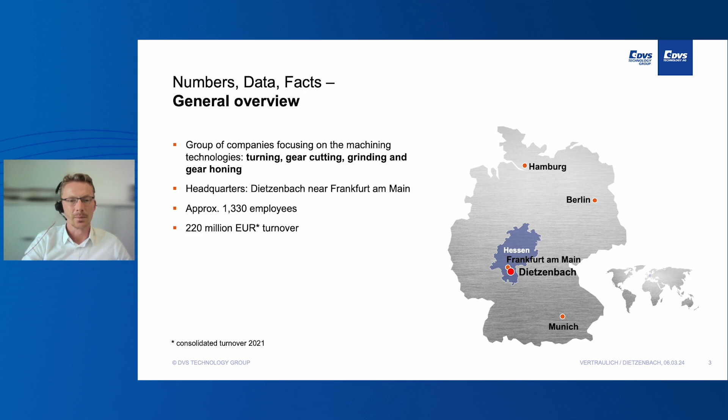This slide might be a little overwhelming, but as I said, we are a big company. Some of you might know some of our companies and brands, for example Präwema, Pittler, Buderus Schleiftechnik - very well-known brand names in the cutting machine tool industry. This is our first business unit, Machine Tools and Automation, which is the foundation of our company.

The second business unit is DVS Tools and Components, where we design and produce our own tools, for example grinding wheels, honing rings, and all the tools for our skiving machines and honing machines. Last but not least, we have a very interesting business unit called DVS Production.

Here we manufacture parts for eDrives in series production. This is very important for this presentation as well, because we are going to talk about the ring gear and the step pinion today. In DVS Production we do serial production of ring gears and step pinions, and I think you can imagine we have learned some really important lessons in this endeavor. Those lessons learned, we of course feed back into the processes and design of our machine tools.

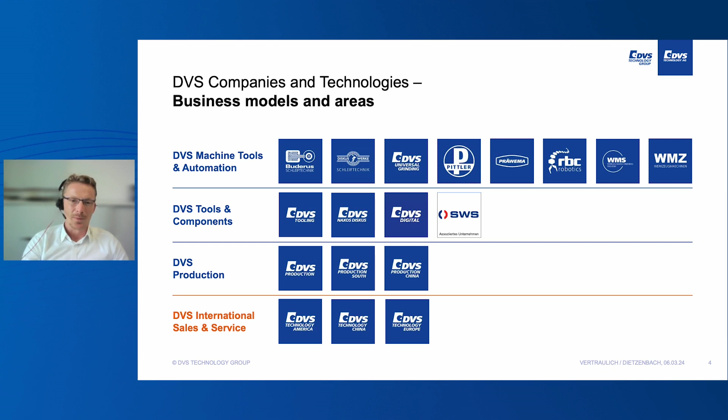In the eDrive industry, regarding gearboxes, we have 2 different basic designs of gearboxes. On the first hand, the offset drive, which is on this slide. We are very proud that we can provide solutions for all the mission-critical workpieces on this gearbox, like the rotor shaft, ring gear, drive shaft, and the two intermediate parts, intermediate shaft and intermediate gear.

For all those projects, we have references in the market. And of course the same goes for the concentric drive. In the concentric drive, there is the ring gear and the step pinion, and those two parts we are going to discuss in more detail in the next 2 chapters.

There are 2 very special things regarding the ring gear, so it's a part which needs to be handled with care - I think that's one of the bottom lines. So that's already a little teaser for our presentation, and the step pinion.

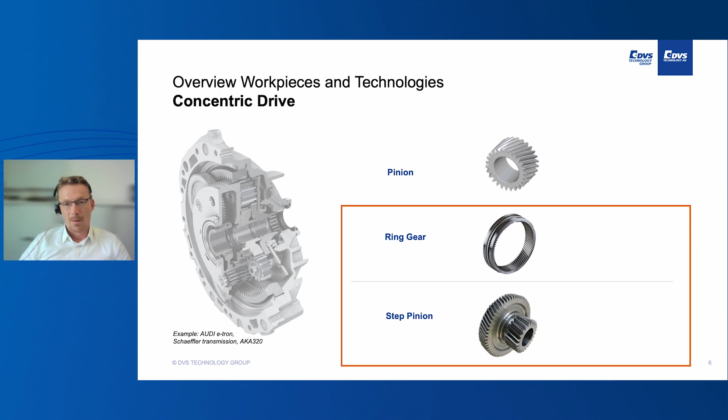There is a feature called timing, which is one of the really special things at the step pinion, which you need to consider during the manufacturing process. Last but not least, all those parts have one thing in common: all the parts I've shown you on the 2 slides are really mission-critical regarding the NVH behavior of the eDrive gearbox. That's really critical, and that's it from my side as a little introduction.

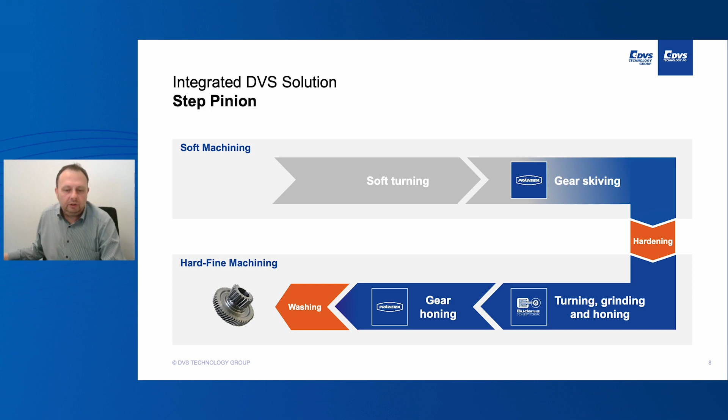As DVS, we are a system supplier and tool machine supplier. For the soft machining, we look at a Synchroform V from Präwema, and for hard machining, we look at the Buderus grinding machine as well as the Präwema Synchrofine gear honing machine.

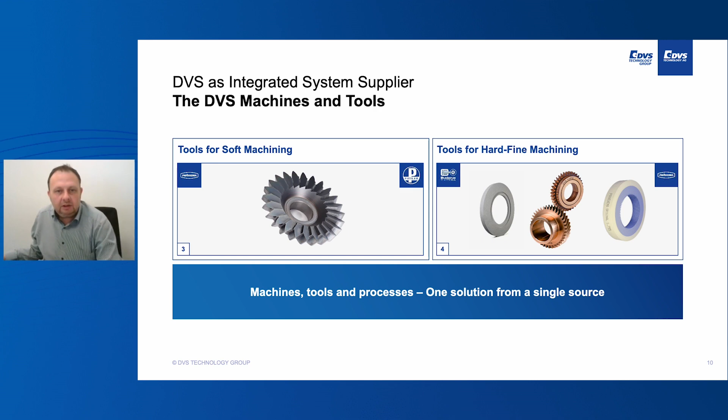Also integrated in our DVS group is the tool business, so we can supply the whole system—the machine as well as the tooling. That includes the design of tools, so we are responsible from beginning to end. There's no interference between the supplier of the tool and the machine, and that's the best solution for our partners on the worldwide market.

Now let's look at the solutions for the step pinion in more detail. First we'll go through the soft machining, followed by hard fine machining of the gear. Before we jump into the processes, it's more or less a must to look at the workpiece.

On this page we show what we call timing. Timing is nothing else than the relation between the two gears on the step pinion, and this relation fits only in one position. This is not true for all step pinion designs on the market, but for many, and it makes it necessary to have the processes under control from the beginning, considering the relation of the two gears from first machining up to final hard finishing. That's important, and later I'll show some points where I can demonstrate the necessity.

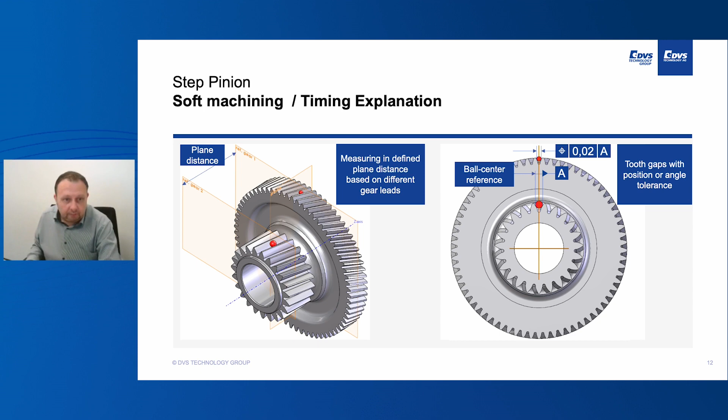Soft machining of a step pinion: the first step, for sure, is the typical turning operation in first and second clamping. This is the first step where we have to consider high accuracy.

Regarding the timing—if you think about the picture before, there is a ball in a helical gear, and if the lengths are not okay, the ball will shift according to the helix angle, and the timing will no longer be in tolerance. That's why it's important to take care from the first process on.

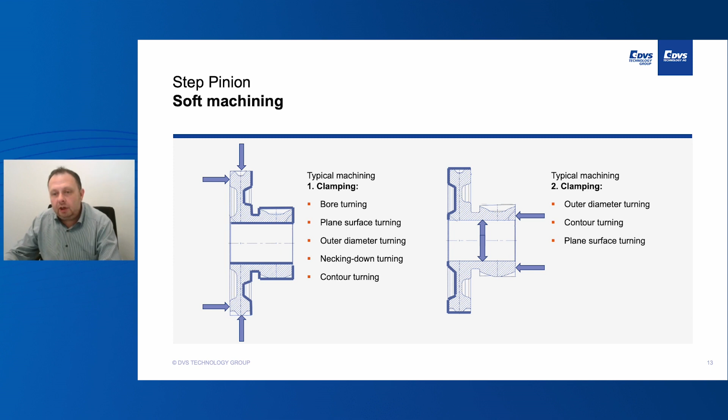So as I said, soft machining typically involves bore turning, outer turning, inner turning, clamping inside, and finishing the outer diameters and outer face of the part. Then we come to the gear machining.

After the soft machining, we use this as a reference to clamp the part and locate it accordingly. We can do a tip diameter turning—this is sometimes requested and recommendable for following processes.

It's up to the customer to do the bigger gear first by skiving, and second the smaller gear by skiving. We can provide different solutions: one could be a machine that does the big gear on one spindle and the second gear on a second spindle. Also possible is a solution with two tools in one workpiece spindle—we call it a tandem tool—so we can produce the big gear and the small gear in one clamping on the same machine. Critical for the small gear is the interference with the big gear.

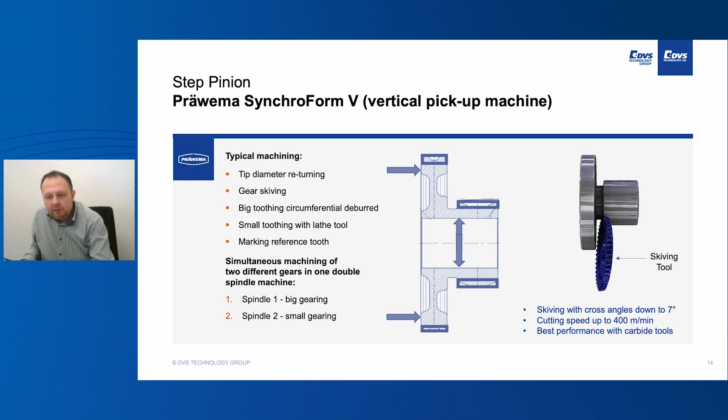This is shown in the picture on the right side. There's a small gap, and this limits us absolutely in the crossing angle, meaning not ideal cutting parameters, but we are able to use the skiving process with a cross angle down to 7 degrees. For information, 20 degrees is the optimal cross angle for the skiving process.

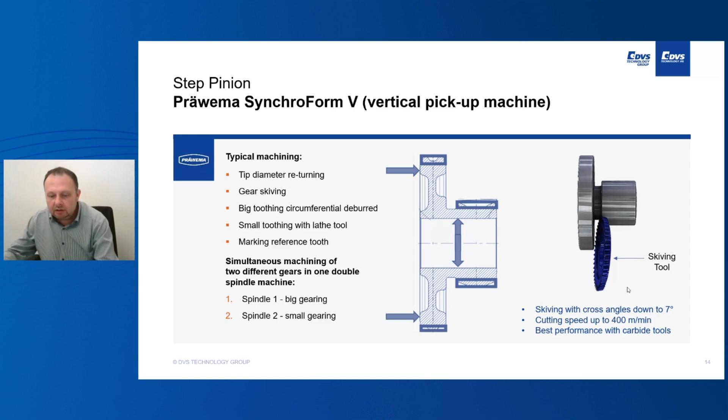After soft machining, we have the heat treatment - not in our portfolio, as I said. That means after heat treatment, we get the part back in our production line, and we will have first hard finishing of this step pinion, hard finishing on Buderus iCompact.

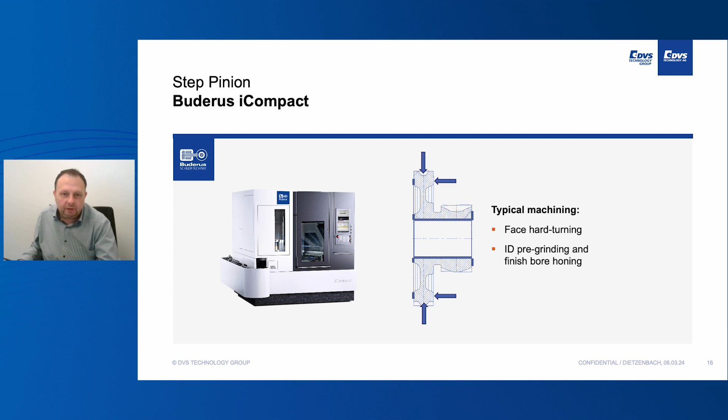The iCompact does hard finishing in two operations. One is hard turning, mostly used for the faces, and the grinding operation to finish the bore. We use clamping inside the gear, or, related to customer demands, clamping on an external OD of the bigger gear. Therefore it's recommendable to do this pre-turning in the soft machining, to keep the best relation between the gears and the bores.

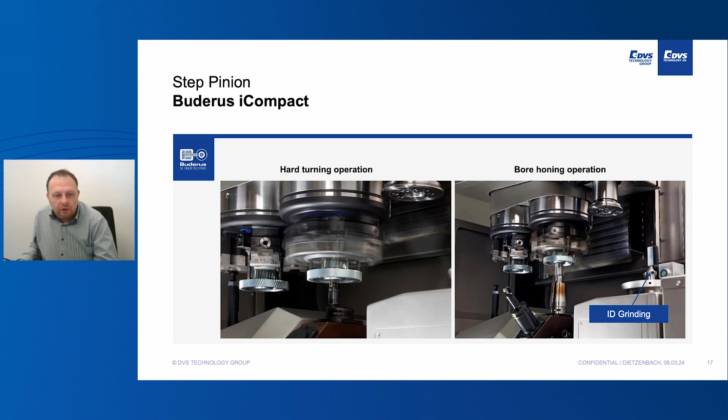Here we show some pictures from the working area of the Buderus iCompact machine. On the left, it shows the hard turning, and on the right, it shows the bore grinding, ID grinding, and bore honing solution, which we have on the market for finishing this step pinion.

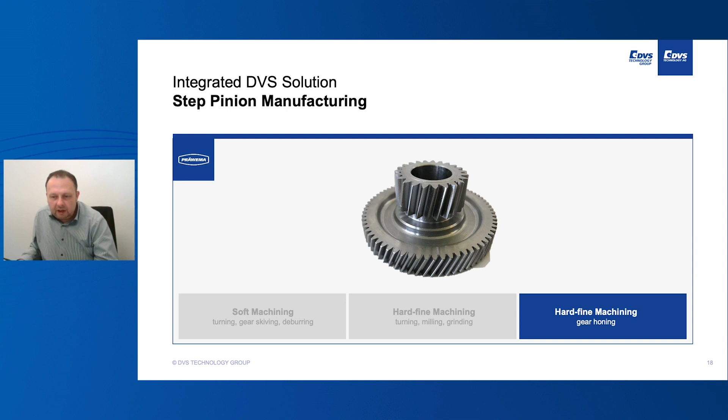Finally, after hard machining of faces and bore, the part needs to be finished in gear accuracy. Therefore we have hard machining of the gear. This will be done in a Präwema SynchroFine gear honing machine, which could be single spindle or double spindle. Both gears could be done by the honing process in two setups - first the small or big gear, up to the customer's demands.

The honing process itself is working with what we call the X-cross angle, bigger than 3 degrees absolutely safely. For the step pinion, we had to push solutions and create solutions so that we are able to hone also with the limit X-cross angle, which is a little bit lower than 3 degrees.

You get all the advantages of the honing process. That means you will not have bias coming out of the process, as happens with the grinding process, but you can create the bias by programming. There is no risk of grinding burn for the gear because the cutting speed is around 10 to 12 meters per second. Grinding burn is to be avoided from a cutting speed which is higher than 18 to 20 meters per second.

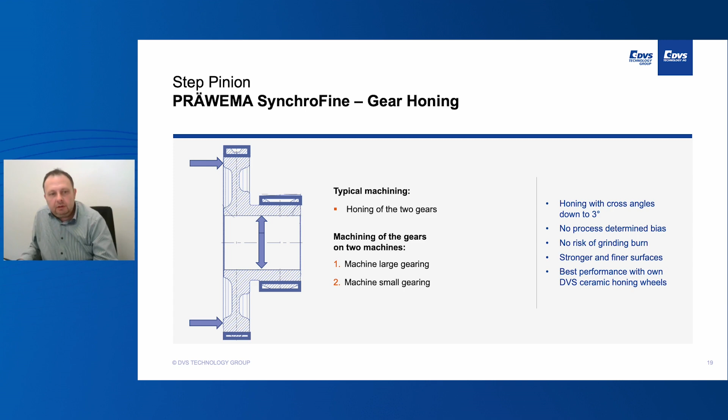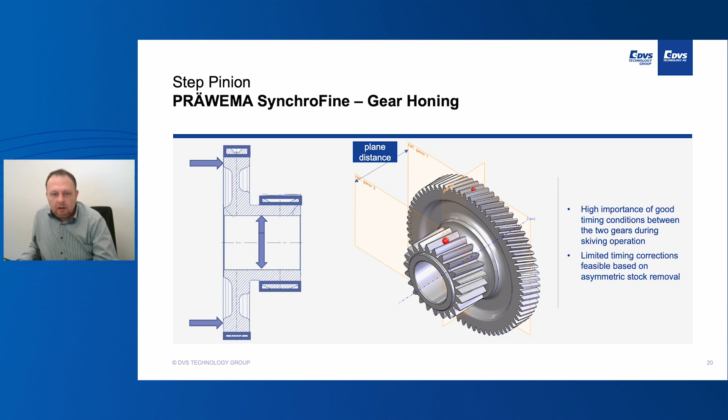That's about the step pinion. Now I'd like to jump over to the second part - the ring gear solution out of the DVS group.

Basically there are two systems we can see on the worldwide market for how to handle these ring gears - two process flows or workpiece flows. In the beginning, green or soft machining is the same: turning, gear cutting, and then it starts to differ, in the hardening process. One solution could be case hardening, another could be nitriding. In case of case hardening, face grinding and cylindrical grinding is necessary because case hardening has much higher distortion than nitriding, and finally we have to finish the gear by gear honing.

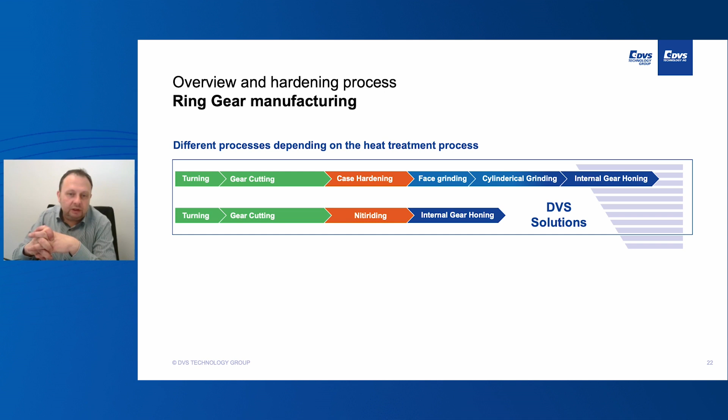In case of nitriding as the hardening process, the distortion is much smaller, and it's not necessary to have face grinding and cylindrical grinding - you can go straight through the internal gear honing.

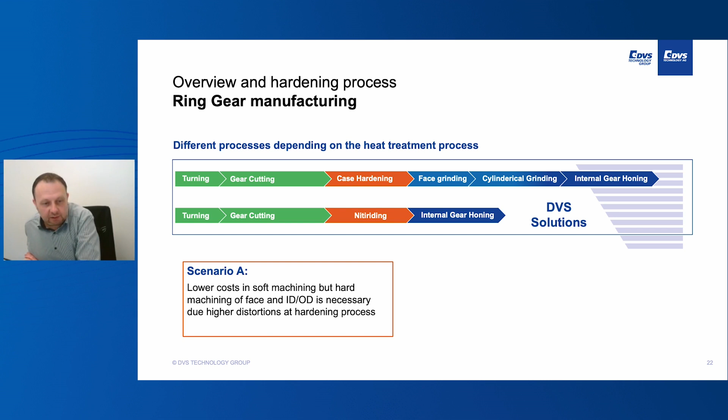Now for sure everybody asks, why aren't we only doing nitriding? It looks much easier with fewer processes. Yes, both have pluses and minuses. Scenario A, case hardening, is the process with much lower costs in soft machining - this is related to the strong material necessary for the nitriding process. Nitriding, on the other hand, has the disadvantage of higher costs in soft machining due to much lower lifetimes of the tools.

But it could be avoided to do face grinding and cylindrical grinding after heat treatment or after nitriding. So these are the two scenarios existing on the market. It's difficult to say which is more or less common. For today, we want to jump a little bit deeper into scenario A.

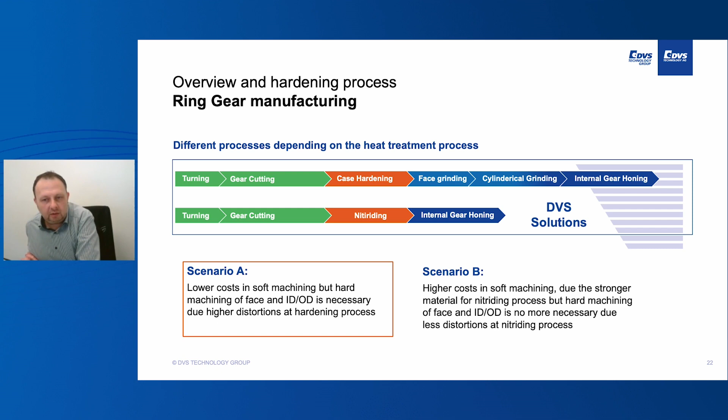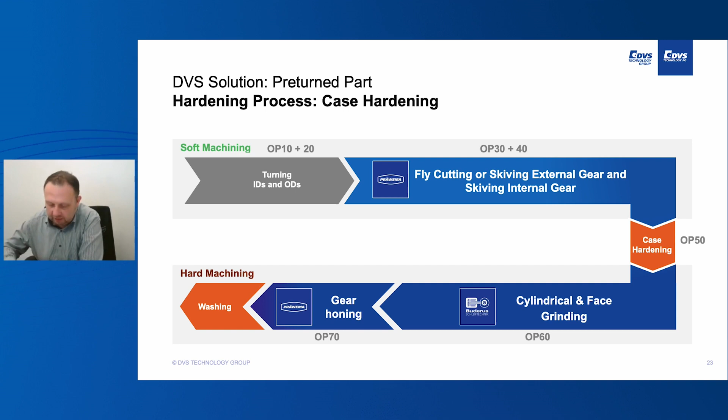In the case hardening process, followed by grinding processes, the process flow will look like shown. We start with fly cutting or skiving of external and internal gear. This is related to the different designs. Sometimes it's necessary to have outer gears, which we do with the second process like fly cutting. After soft machining, it's the same case hardening outside of the DVS portfolio. Then we get the parts back to a Buderus grinder and do the grinding operation, face and bore grinding and hard turning. Finally we have the gear honing, and after that the parts go through the washing line.

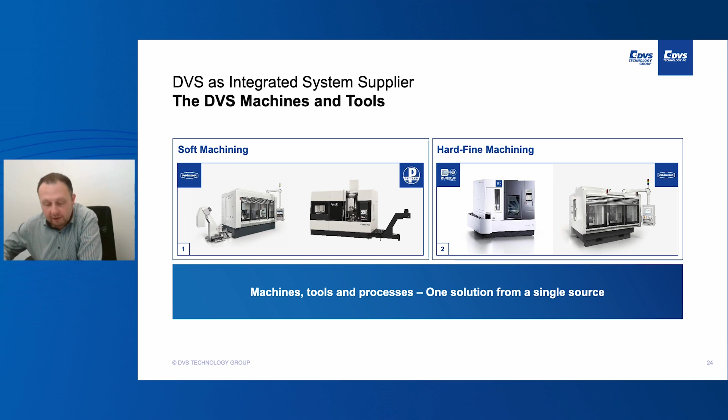The solution for the DVS group or machine solution from DVS side could be soft machining at PRÄWEMA or either a Pittler machine. This is related to number of workpieces, sizes, and also space on the floor. Hard fine machining will be done in that case at Buderus for the bores and faces, and at the Präwema SynchroFine for finishing the gear.

The soft machining in that case will be on a PRÄWEMA machine, followed by hard fine machining in the next step, also for the ring gear.

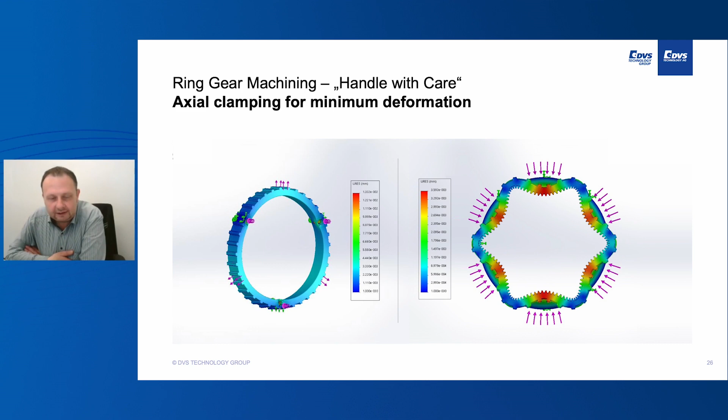We have to talk about the workpiece themselves before we jump into the processes. The ring gear has, from the shape, not the best conditions to clamp in the machine and to control deformations. That means if the clamping is too strong, we deform the part, or we give the part a form, and after releasing it flips back to the older form, or we can see the gripper jaws, for example, or the brackets from a clamping fixture later in the measuring reports.

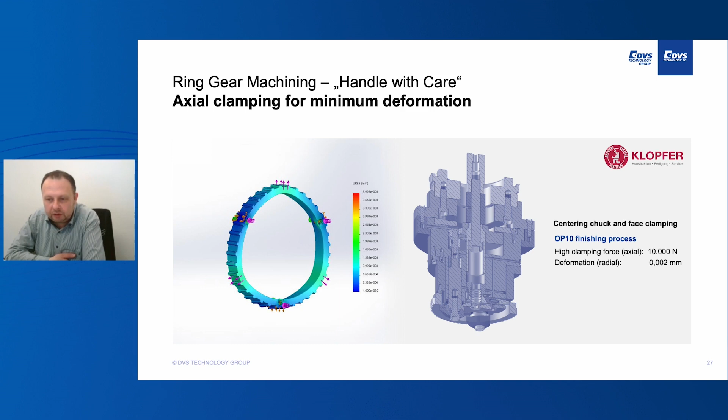So therefore different solutions exist. One solution shown here is working with a slight centering so that we avoid any deformation in the circle, and a face clamping with 10,000 Newton. This avoids the radial deformation to less than 2 microns.

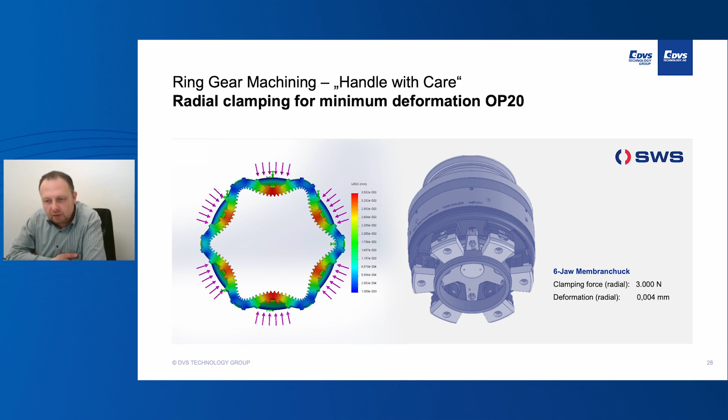Another solution could be a 6-jaw membrane chuck, and with this 6-jaw membrane chuck, less clamping force is necessary. We're working with 3,000 Newton, and with the 6-jaw it's possible to have more or less equal pressure over the 360 degrees, so that we don't have much deformation. We're talking about 4 microns in that case.

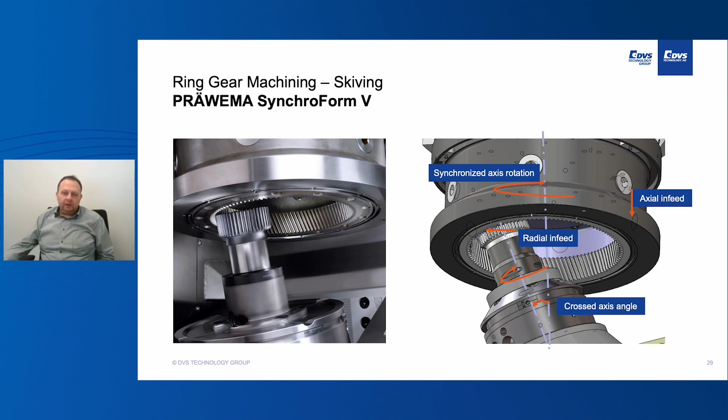So now the Synchroform skiving machine for soft machining. It's a vertical machine available in different options or configurations. The skiving process itself works with the rotation of both axes, meaning the workpiece and tool axis rotate at the same time. With the synchronization given from the NC control and an axial feed rate, we can cut the gear step by step through the tooth, through the ring, and then we get a ring gear.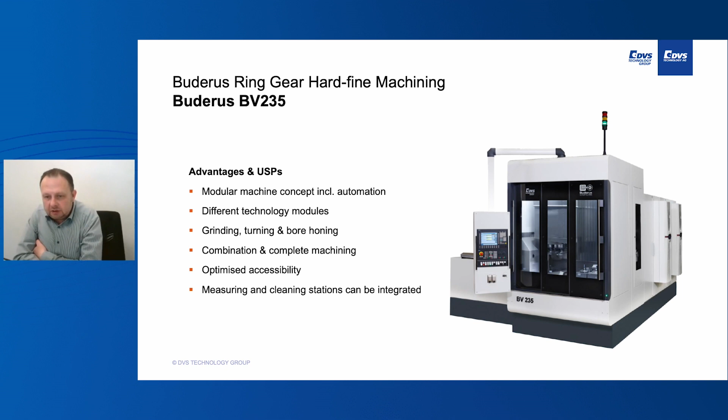After soft machining, followed by heat treatment, we get the parts back for hard machining, turning, milling, grinding on the Buderus BV235 machine. This machine is very good with the modular machine concept, including automation. You can implement different technologies, and this is done on what we call a technology platform, where we can place the technology modules according to the necessities of our customers.

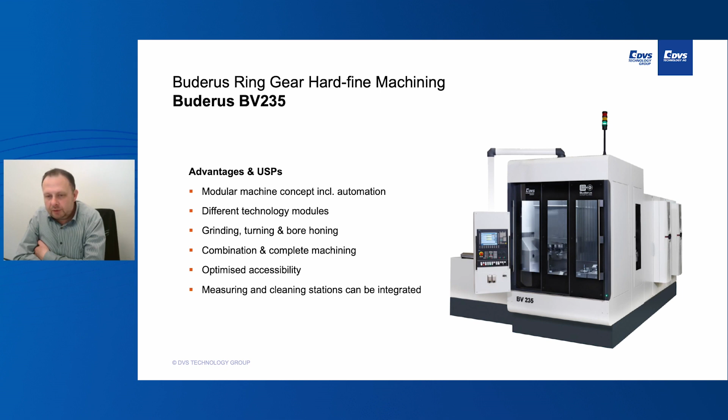We try to put this on a very small working area that's good and optimized for cycle times as well. It saves floor space in the factories, which nowadays is also many times a question. Last but not least, different measuring and cleaning stations are also available. If there's a need, we can install this in the automation area so that measuring and cleaning can be done in parallel while the machine is working, causing no additional cycle time.

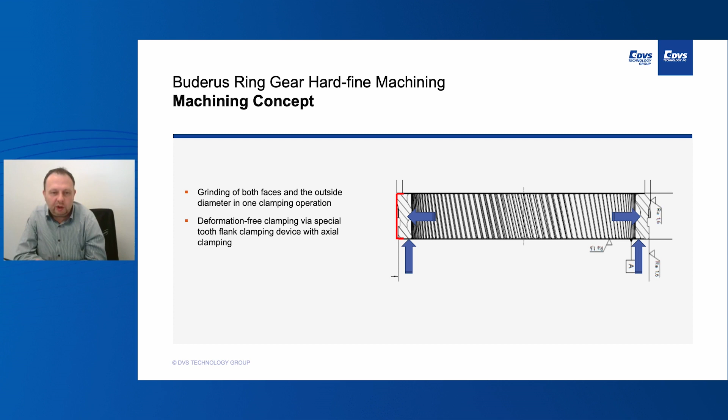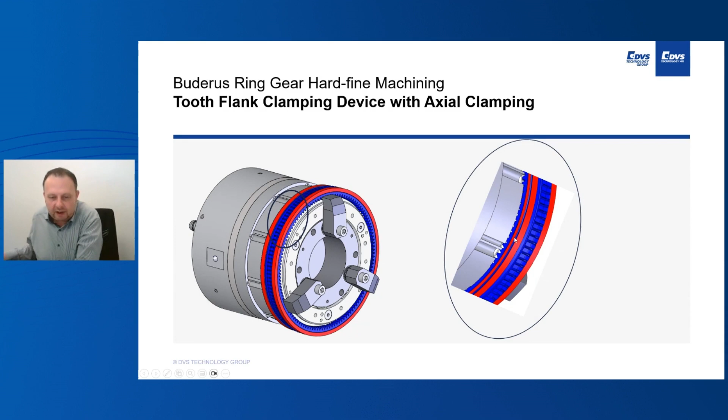The ring gear clamping system at the Buderus hard fine machining has the possibility to do orientation in the gear, and we can center in the gear, clamp on the face, and do the grinding of both faces as well as the external diameter in one clamping. That shows the clamping solution, and the red marked areas show what will be done in one clamping at the Buderus machine. That means grinding of the first face, front face, the diameter, and here we have a look from the rear side, where we also do the grinding on the rear face. So one clamping and the part is finished in the grinding operation.

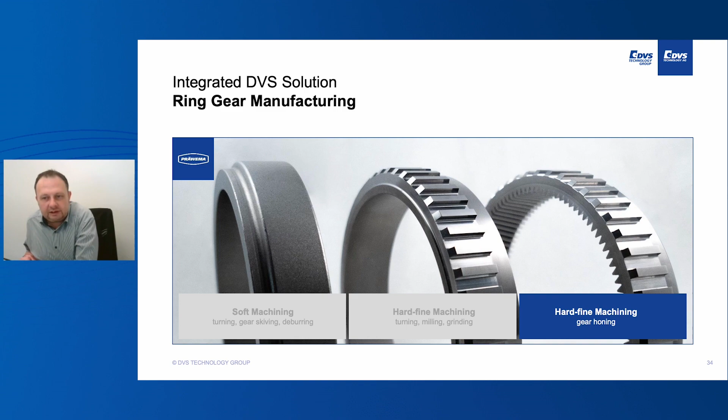After this grinding operation, the part goes through the hard fine machining of the gear. This is done by internal gear honing, and the internal gear honing uses a similar system to the skiving and the same system as external gear honing. We need a cross between the two axes, the axis of the workpiece and the axis of the tool, and we also need synchronization from NC. We have a radial feed rate and a small oscillation, and it takes around 60 seconds to clean up the part and do all the corrections necessary and required for the final part quality.

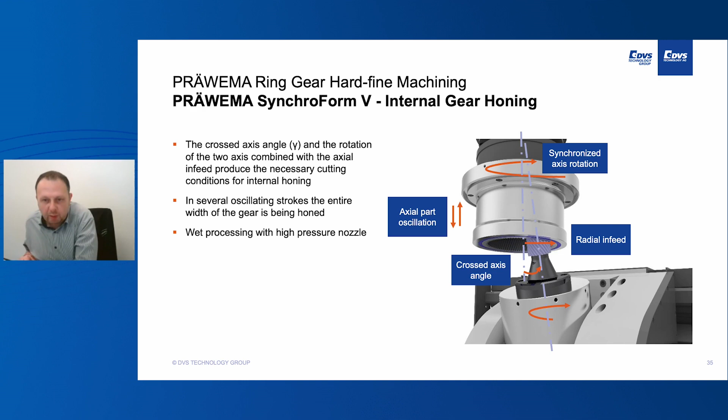In clamping for the internal honing, we use the same locating area as given from the grinding process in the Buderus machine, and we clamp on the same diameter produced in one clamping at the Buderus machine. In combination with the orientation of the tooth and the centering at the pitch diameter, this is the best solution to get very good quality out of the honing machine. If both processes are optimized, there should be no deformation and no deviations in the measuring report after hard machining.

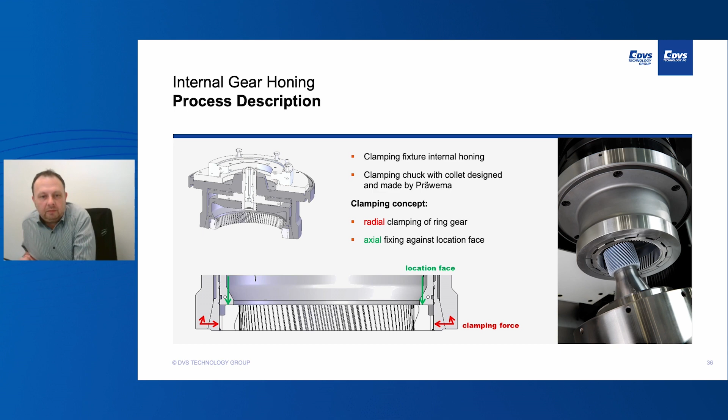One question was not given, but I want to talk about it: why we have to do hard finishing, in that case internal gear honing of the ring gear.

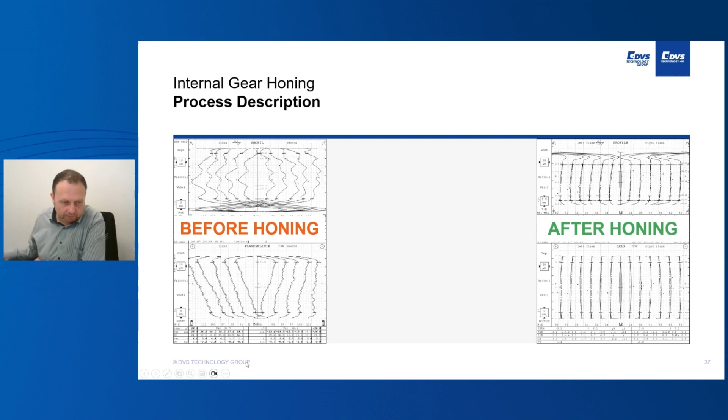This page shows on the left the measuring report from a ring gear after heat treatment, before honing, and the right picture shows the measuring report of the same gear after honing. The required quality nowadays for all components in the e-drive is according to what we see on the right side. Parts without hard finishing are no longer usable for the e-drive nowadays.

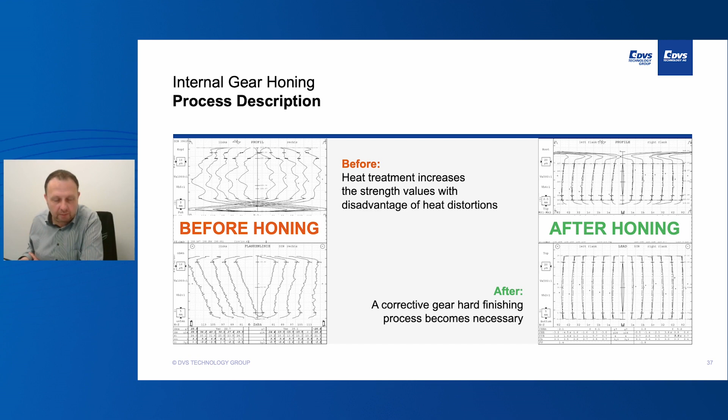Hard finishing of internal gears, in comparison with external gears, is absolutely seldom, and it came up in the car industry with the e-drive. Internal gear honing is in that case the best solution, because we can offer the best solution in costs per piece for our customer. We did different and many tests, and this shows a scenario from what we did one or two years ago.

We did production on a ring gear, and we started with a diamond coated tool, with tool costs at 80 euro cents, 0.8 euro. We changed to the dressable tool and came down to 40 euro cents, meaning we had half the costs. It was also interesting to compare it with hard skiving, since we have all of that in our hand.

That means also the production of skiving tools. We did it, and the outcome was that we are much higher in cost than with the diamond coated tool, and finally four times higher than with the dressable tool. The dressable tool is more or less the state of the art nowadays for internal gear honing.

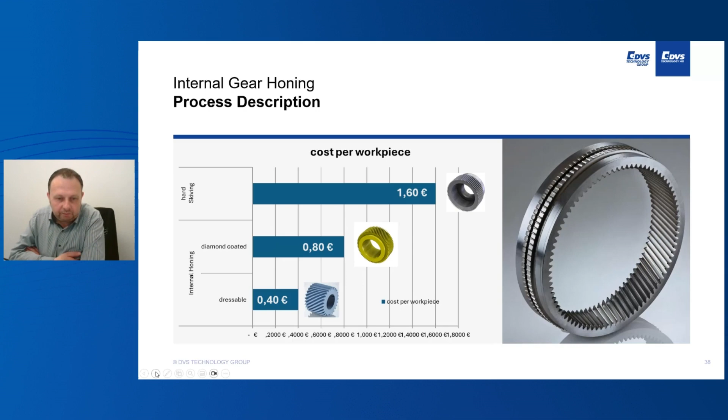Thank you, and I'd like to hand over to Andreas, who will give you a short summary about the pages before. Thanks, Mark. I think that was a very important and interesting presentation regarding the two workpieces, step pinion and ring gear.

As a little summary, I think we can say step pinion and ring gear are really demanding workpieces which are critical in modern e-drives. What we have learned is that the step pinion timing needs to be considered from the very first chip, even in soft machining. I think that's one very important conclusion, besides all the other things we have learned.

Regarding the ring gear, as I already said in the beginning, it is a very sensitive part which needs to be handled with care. And regarding the clamping, there are some important things to consider. And of course, for both parts, as Mark very nicely explained...

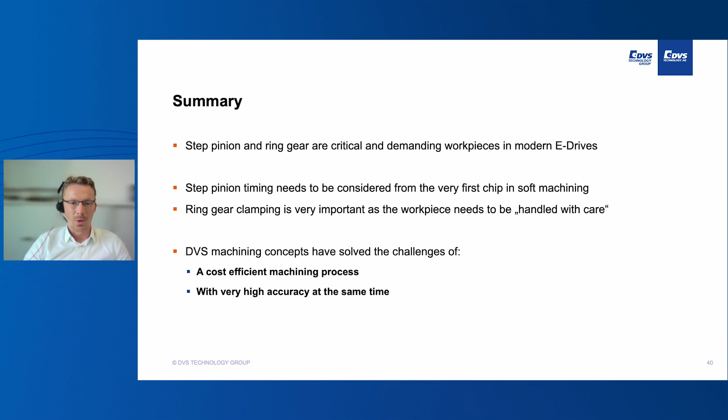...the hard finishing, the gear honing, is the last step. So that's one very special thing. I would say our DVS machining concepts solve two challenges: first, which is important for all of our customers, a cost-efficient machining process, and at the same time, a complete process chain with very high accuracy.